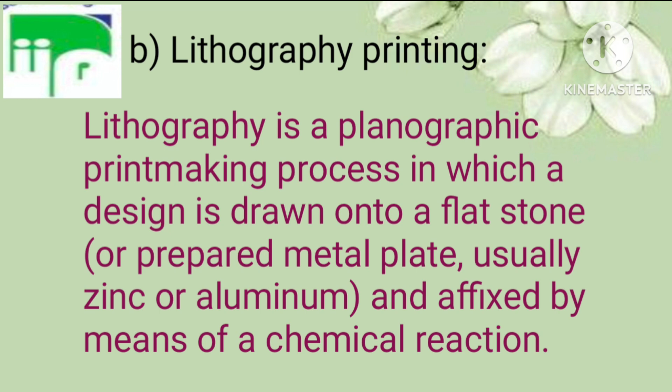Next one is lithography printing. Lithography is a planographic printmaking process in which a design is drawn onto a flat stone or a metal plate and affixed by means of a chemical reaction. Here you can see lithography printing. You can see ink and a water roller, then blanket cylinder, printing plate, impression cylinder.

So basically letterpress printing is used for printing books, newspapers and posters, while lithography printing is used to print maps and artworks.

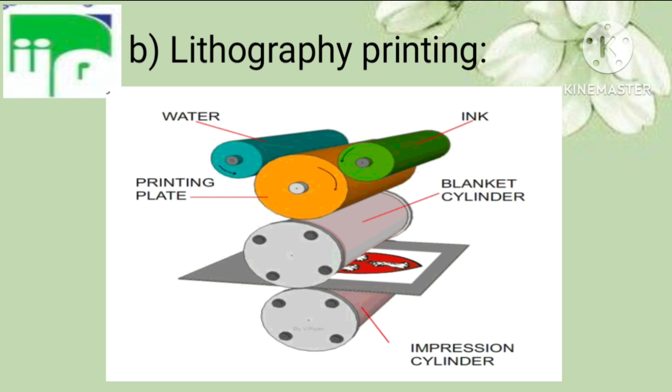Third one is gravure printing or rotogravure. Gravure printing is a widely used processing method, often used to print large volumes of magazines and catalogs. As opposed to flexo printing, the ink in gravure printing is transferred from carved microcavities and not from a relief.

These cavities, embedded in the printing cylinder, form the printing pattern. Here you can see in the image this engraved cylinder, usmein chhote chhote engraving letters ki hui hai, which when moves from the ink fountain, the ink is deposited in these gravures. Then the blade will remove excess ink and the impression will be on roller on print paper.

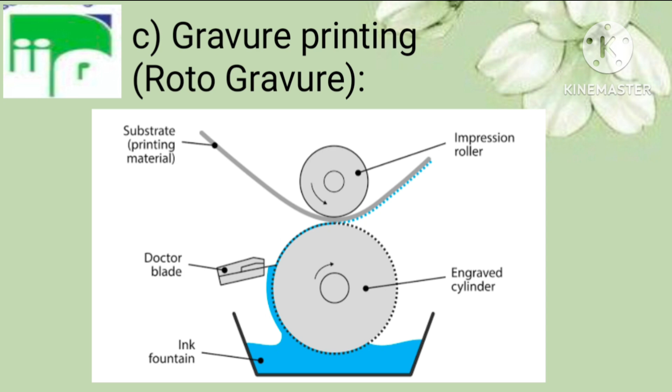So it is used for high quality and large volume printing like magazines, catalogs and packaging.

Next is flexography printing. The ink is applied to the plated image. The substrate is then pressed against the plate with an impression cylinder applying appropriate pressure to transfer the image onto the surface. A series of UV lamps or infrared dryers dry the ink prior to the next process.

Here you can see how printing is done. In this image you can see the flexo plate cylinder, then anilox roller, and how printing is done.

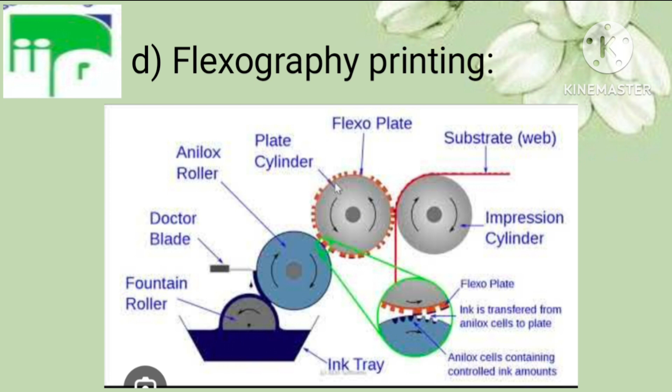So moving to the next type, it's modern printing. Modern printing technique contains four types: offset printing, digital printing, screen printing, 3D printing and sublimation.

Offset printing. Offset printing is a widely used commercial printing technique in which the ink image on a printing plate is printed on a rubber cylinder and then transferred to paper or other material. Here you can see in the image. So basically this type of printing is used for printing books, magazines and brochures.

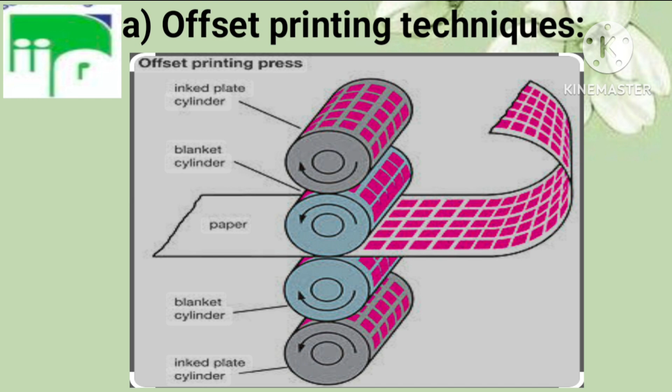Then digital printing technique. Digital printing differs from traditional analog printing methods such as offset printing because digital printing machines do not require printing plates. Instead of using metal plates to transfer an image, digital printing processes print the image directly onto the media substrate. Here you can see print head, laser, photo imaging, blanket cylinder, and print on material.

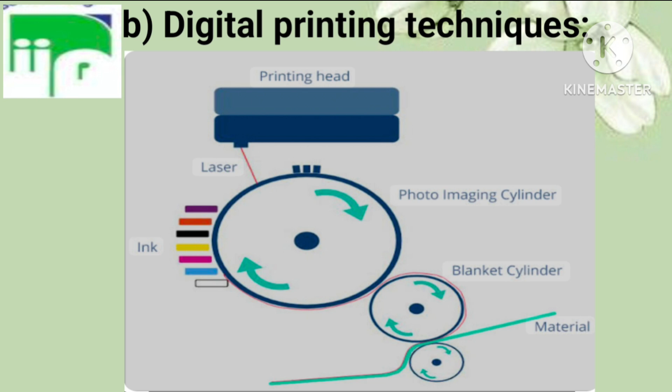So it's used for posters and business cards. Next one is the screen printing technique.

In screen printing, first we need design creation. The first step in the process of screen printing is to create the design. Now selecting and preparing the screen, exposing the emulsion, stencil creation, preparation for print, applying the design, heat curing, and finishing. Here, the whole process can be divided like a template.

First one is blade, ink, screen, template, paper, base, etc. So it is used for textile posters, then promotional items.

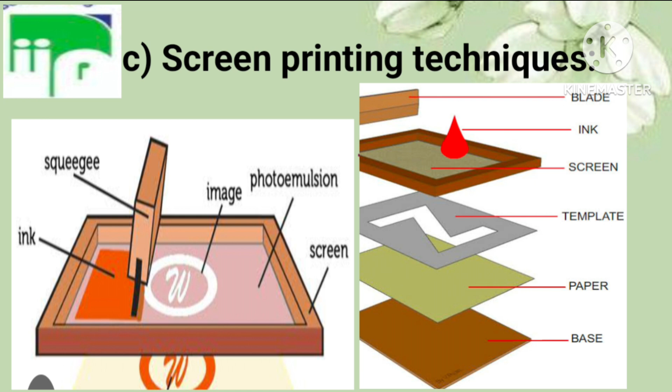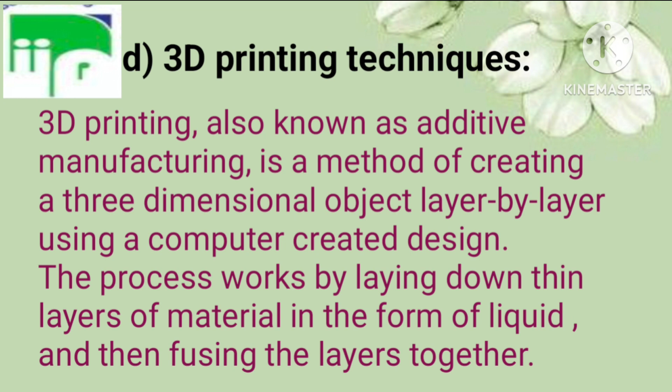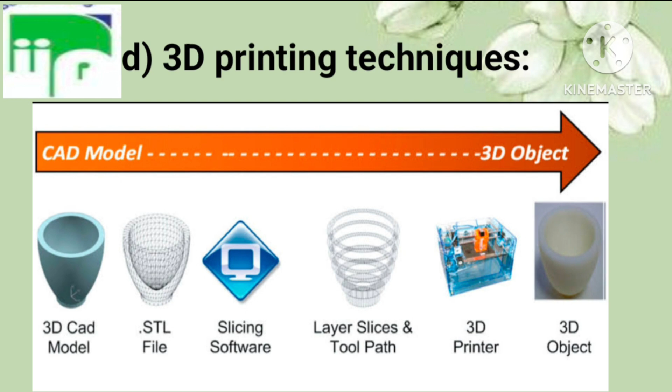Sublimation printing technique. Sublimation printing is a digital printing process that uses heat and pressure to transfer dye onto different materials. Here's the full process: you print a design onto special transfer paper using sublimation inks, then you place the paper onto a product and heat it with a heat press.

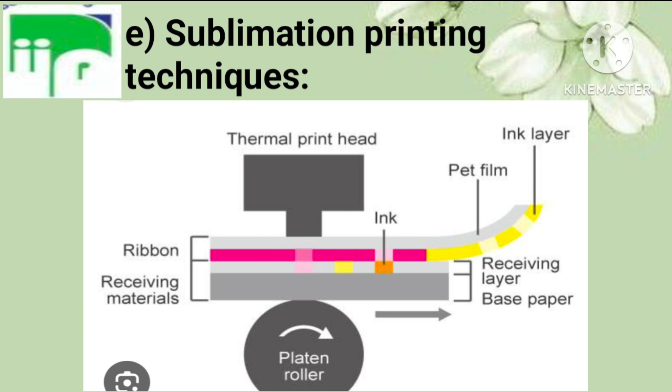Here in the image you can see ribbon, receiving material, ink layer, pet film, ink, thermal print head. So the receiving layer is below, and printing is done.

Pad printing technique. Pad printing is used for printing on otherwise difficult to print on products in many industries, including medical, automotive, promotional, apparels, and electronic objects, as well as appliances, sporting equipment, and toys. It can also be used to deposit functional materials such as conductive inks, adhesives, dyes, and lubricants.

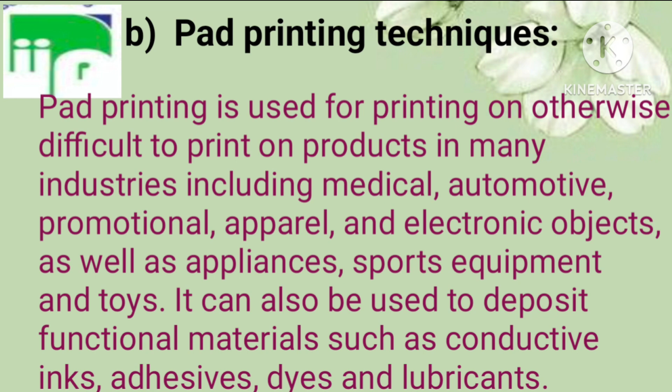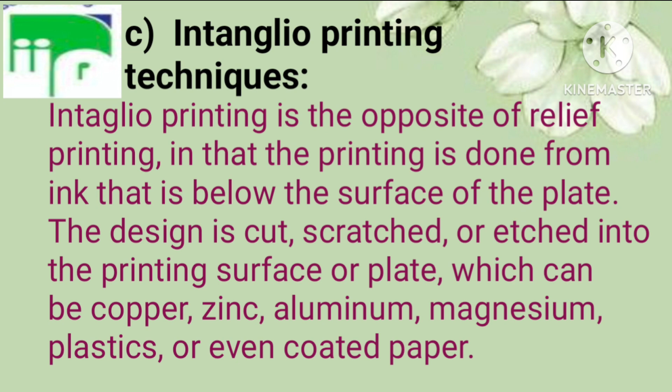Last one is innovation trends, which is also of three types: UV printing, nanography, and hybrid. UV printing uses ultraviolet light to dry the ink as it is printed. The printer distributes the ink on the material's surface and UV light follows from behind, drying the ink instantly. It is basically used to provide high quality and durable print across a wide range of materials.

Next is nanography printing. During printing, ultra small particles of ink are jetted onto the conveyor blanket. The ink droplets are then dried on the blanket and the dry image is then transferred to the paper. Nanographic printing uses its own specially formulated ink called nano ink, which enables precise, efficient, low ink laydown.

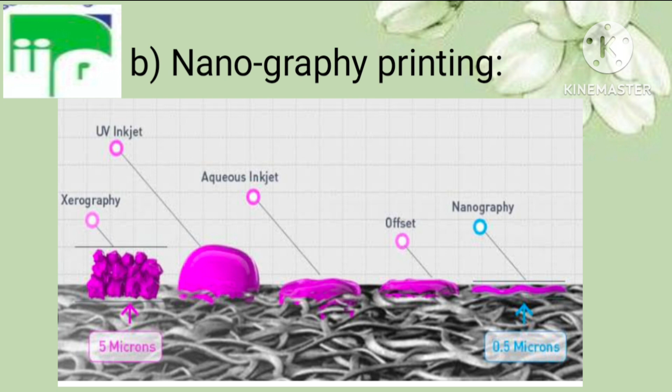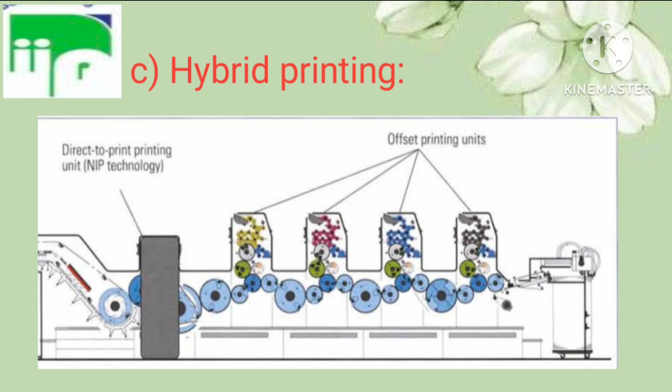Moving to the next, hybrid printing. Hybrid printing is a single pass process which combines multiple printing technologies and converting techniques with the aim of leveraging the capabilities of both conventional and modern methods. Here you can see in hybrid printing, different types of printing can combine together to produce a high quality and complex printing process. It is used for complex print jobs requiring high quality and versatility in printing.

So these are the major printing techniques which we have covered.